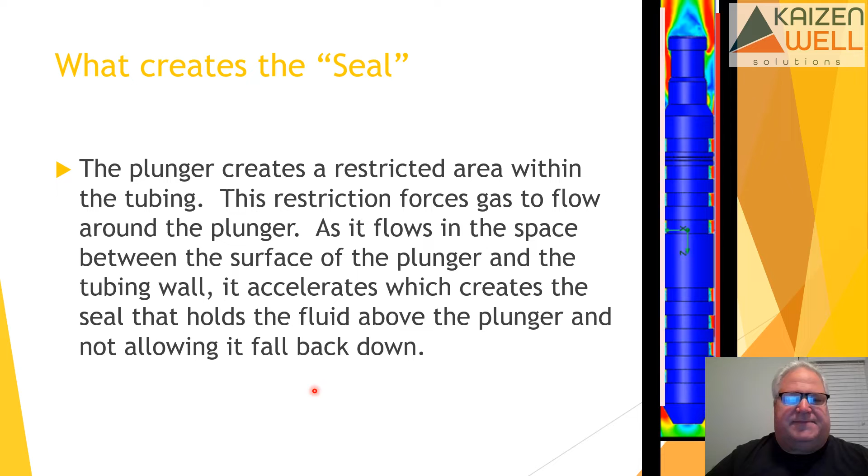So here's gas breaking around the outside. As that gas is coming around the outside, in this case it's an example of a ring or rib type plunger. Gas goes across these ribs, creates eddies and turbulence and stuff like that. That turbulence also helps increase the lift. Also, every one of these surface areas that there's a differential across increases that ability.

But if you didn't have these ribs or these different surfaces, what would happen is you'd get what's called channeling. So if this was just one solid piece of metal without any kind of profile on it, you'd probably have gas channel and break up one side and liquid just fall down the other. So it's important to have these type of surfaces in a ring type plunger, for example, to minimize the chance of that happening. It does increase the efficiency.

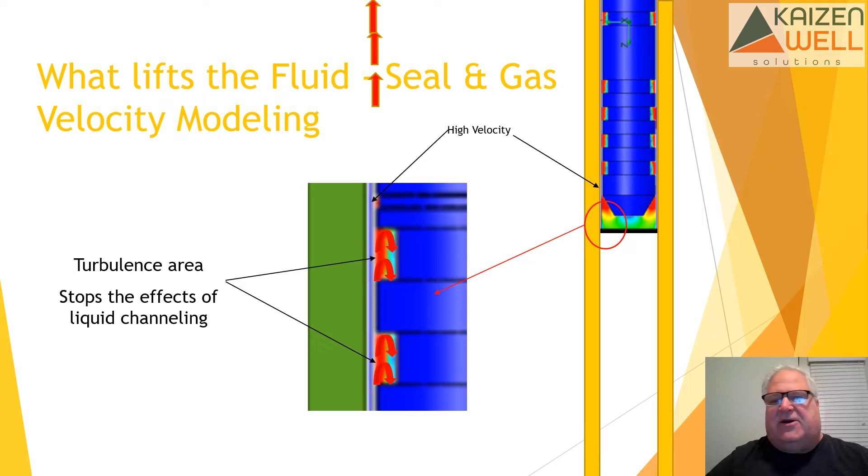So there's just an example, the plungers going by in this little animation. But as that turbulence is moving, it's definitely helping create an increased seal.

Now, one of the things that's really important to know is that a solid plunger, a ring type plunger, can never be greater than tubing drift. If it's bigger than tubing drift, there's a good chance that it could get stuck. Typically your drift area, when you talk about tubing drift, is the smallest area that should be in that tubing. So for example, standard 2 3/8 tubing would have a drift of about 1.901 inches.

And that's typically going to be in the collar area here. So when the plunger tries to go between the two joints where the collar is, that's going to be probably around 1.901 minimum. So that's the size.

Now, what's interesting and people don't realize is it's a very small piece of the tubing. When you get up to the middle of the tubing, most of that tubing is probably 195, 196, 197. So there ends up being quite a bit of area flowing around a plunger. Right away, that large area is one of the reasons why solid plungers are typically not as efficient as a pad type plunger or some of the other styles of plungers like a brush or whatever.

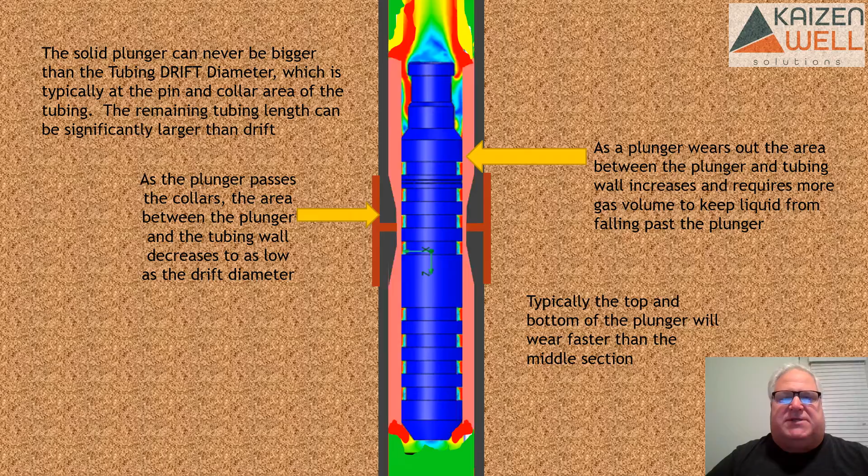Now, here's an example of a pad. Why is a pad plunger more efficient? Basically, these spring-loaded pads are able to push towards the tubing wall, and when they come to a tight spot, they can collapse, and then they can expand into these larger areas.

So it's keeping that area between the plunger and the tubing very, very tight. What's interesting is that when the plunger is traveling up and there's gas pushing underneath, that gas force is actually pushing these pads in, and they're not typically pushed right out to the wall. The gas is actually still running by them. They're not creating a metal on metal seal.

Now there might be a little bit of wear. You'll typically see these pads will wear more on the tops if they're like a dual spring type pad, because there's actually more pressure pushing the pad back in than at the top. So they run up the well at kind of an angle, so they'll wear more on one side than on the other.

The other thing that's interesting is, and we'll talk more about why you shouldn't use these in a wax or paraffin application, is that because the pads are collapsible, when you're bringing them up, they actually squeeze in just a little bit. That gas going by them pushes them in.

And if you're leaving even a very small microfilm of paraffin on the tubing wall, when that plunger goes up, it's squeezed in. And then when you stop flowing the well, those pads, the springs are able to push back out. And when it tries to drop, it is rubbing down the tubing wall. So even if you left a very, very thin layer of paraffin, that paraffin will start to build up underneath the pad and it can hang up the plunger.

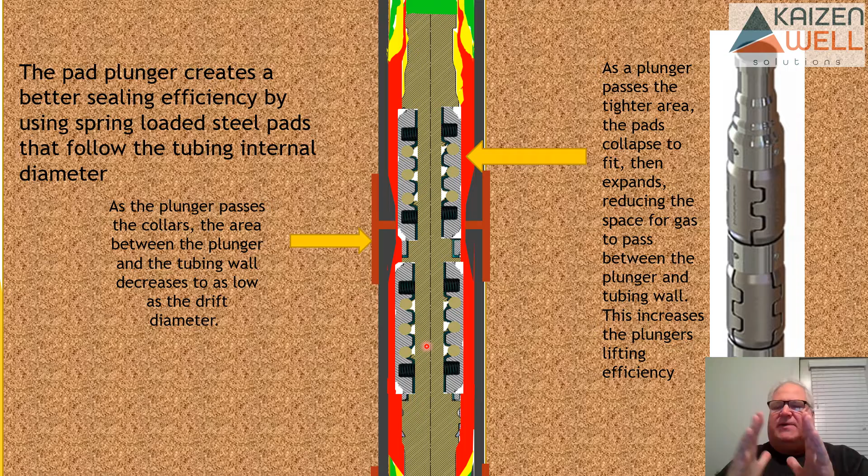So that's one of the reasons why you wouldn't use a pad in a paraffin application, just by that action, because it compresses and then it expands fully on the way down. So that's definitely one of the things you have to watch for.

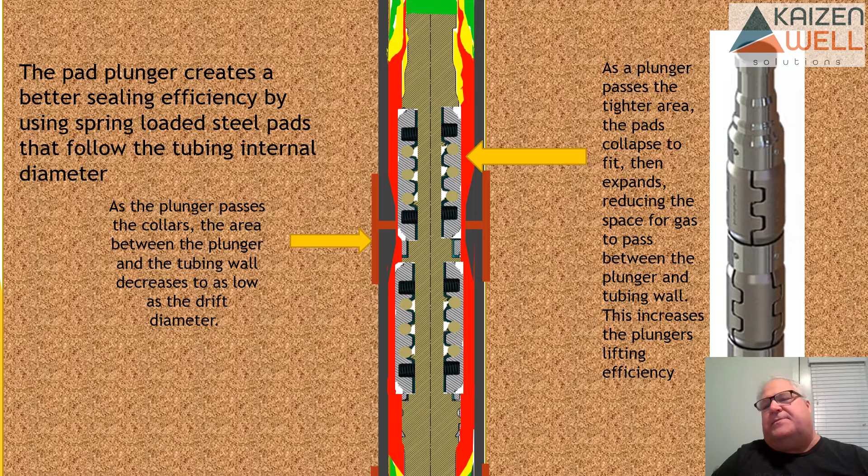We get asked all the time, when do we replace the plunger? Everybody wants to know what is the wear - do we replace it at 20 thou? Do we replace it at 30 thou? Or what? Well, the simple answer is that a plunger should be replaced when it impacts your production. And anybody that tells you you should do it at 20 thou, it's not being honest. You should replace the plunger when it impacts production.

But one of the easiest ways to decide or figure out when you should replace that plunger is your operator should be carrying some plungers in their trucks. And every month or so, they should go out there, look at a couple of wells, drop a plunger in, and look at the production yesterday versus the production tomorrow. Did we see an increase? Did we see an improvement? And if you see an improvement, then that plunger that you took out is worn too much.

You let it run too long, and that could be 1 month, 2 months, 3 months, 6 months, a year - it doesn't really matter. But once you've identified when it makes that uptick again in that well, that's good information to have, because if it was 3 months between the new plunger and when I put in the next plunger, what that tells me is that 3 months from now, after I put the new plunger in, I'm probably going to need another plunger replacement.

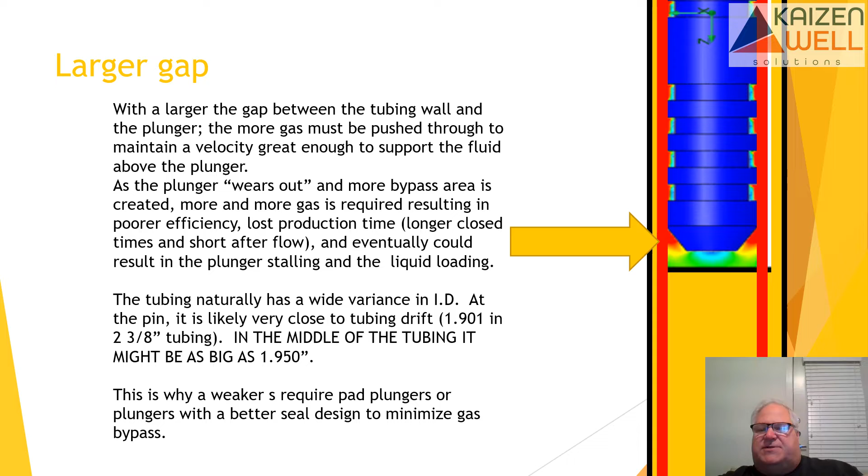Important point, especially about a rib or a solid seal plunger, is efficiency is not just the OD of the plunger. What even has a bigger impact than the OD is the overall length of the seal surface. So from this point to this point, the longer that area is, the more efficient the plunger will be.

Now, don't these when I call them plunger efficiency averages, it's probably kind of misleading. What this was is we took some data: how much gas flow did we need? What kind of pressure differential do we get across a plunger? There are several factors that we put into a bit of an equation that created this percentage efficiency.

Now, it doesn't really mean that a 10-inch plunger is only going to lift 42% of the fluid from the bottom. If you start off with a barrel, you're only going to get 42% there. That's really more an efficiency on the energy that it's using, how much gas it has to flow by, how efficient is the seal, and all that stuff.

But really what was quite interesting is when we got up to here with a 24-inch plunger, where we had a seal that was close to 24 inches long, we were almost as efficient as an average dual pad plunger.

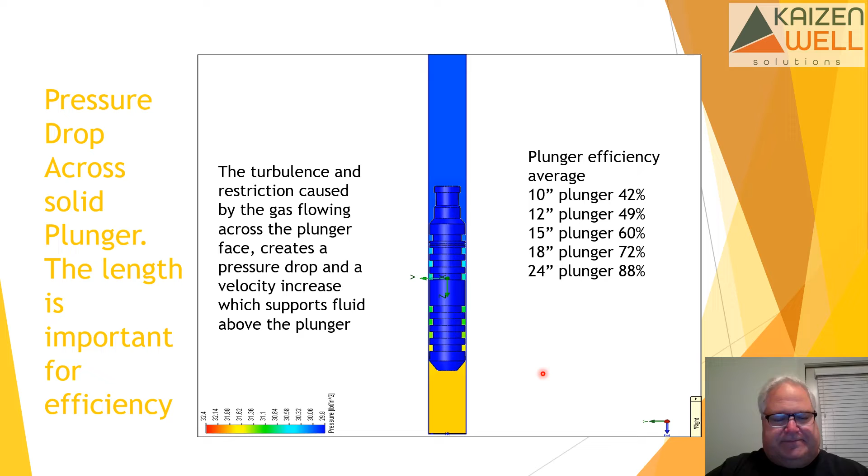Plunger efficiency. A plunger that's worn from 190 to 188 can actually lose over 50% of its seal efficiency. Really, what it means is it increases the bypass area between the tubing and the plunger by probably 50%, roughly. So there's a lot bigger area that it can flow by, and we've seen that when we track plungers using echometer and different methods, trying different plunger ODs and how that reacts in a well.

When a plunger is in a deviated section of the tubing, it also loses some of its efficiency.

It's interesting when we're following plungers that might be dropping and then they get to a dog leg in the well and it kicks over and goes straight again. We'll actually see the plunger speed up going through that dog leg, even though you'd think they'd slow down because they're laying against the tubing wall. But really what's happened is they fall against that tubing and there's so much bypass area created over the top, or less restriction, because when the plunger is falling in a nice vertical, it's shaking - you can hear it rattling and bouncing, creating extra turbulence and restriction as it falls down the well. When it gets on its side, it lays flat on that dog leg and has a large bypass area on top, and that plunger will actually speed up. We see that all the time.

It'll have the same effect coming up. If you've got a well with a large dog leg in the middle of a vertical section, you may have a lot of trouble getting through that section, and it can really impact the way those wells cycle. So that's something to be aware of if you're looking at your completions.

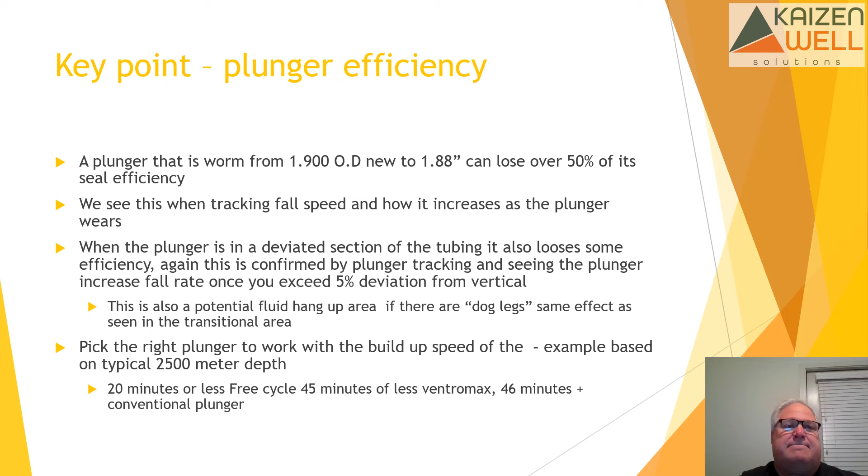This next section, we're just going to talk about seal types and kind of their applications - just where I would suggest to use a seal type and what application. It's not the plunger type, it's the seal type. So we're talking solid, ring type, brush, pad. Those are kind of the three main ones we would use. So we're going to talk about that in this next section.

So you've got a solid plunger. Here's an example of a solid plunger. It has a solid seal face, can't be collapsed, so it's not going to do well if you have tight spots or problems in the tubing. The pro is they're typically low cost. Some of the cons are they can be inefficient, but as we talked about, a properly designed solid plunger and the length of that plunger can really swing it from an inefficient plunger to quite an efficient plunger. Mostly used when we have wax or solids, and kind of general use - the general workhorse of most plunger lift applications.

There's another example where we have the ribs cut into it that'll make that plunger spin a bit when it's falling or in a gas stream.

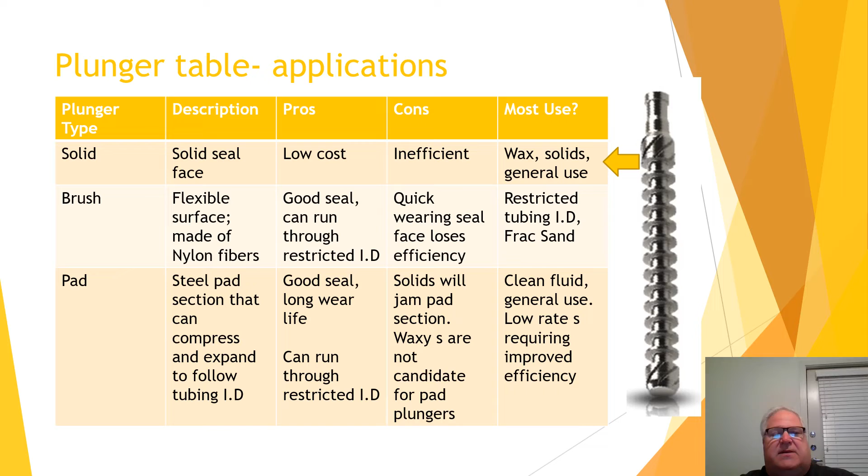Then we have a brush. The brush is a flexible surface, typically made of nylon. Sometimes it's like a coil slid onto a mandrel, sometimes actually wrapped and wired right to the plunger body. They have an incredible seal - in fact, some of the best seal you can get. But unfortunately, that seal lasts a very short time.

Typically this soft face wears very quickly. It can be affected by heat, so if you're putting it into a fairly deep well with high bottom hole temperature, it'll shrink that material very quickly. Once you've worn the fibers down, the plunger body here on the end will be like 1.86, or something like that. So it'll wear these fibers down quickly, and then you've just got a 1.86 OD plunger in a 2 3/8, and you lose a lot of efficiency.

Where I do like to use them is where you have restricted tubing, where you might not be able to use a solid, and you have solids present. If I had restricted tubing and didn't have solids, I'd probably run a pad plunger. If I just have sand, I'd typically try to run it with a solid or a ring type seal first - I find they work as good, if not better, than brushes.

Lots of times you'll find the brush, depending on the sand type, will actually pack into it, come up, and stick in the lubricator, whereas we can get solids to clean - they'll clean a little better when they come into the lubricator.

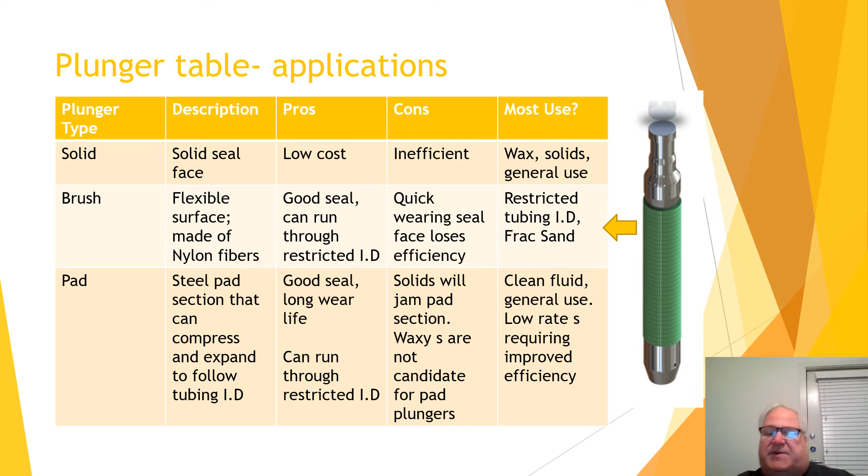So they have a great application, but I typically look to use them in lower rate wells, lower GLR wells. They have to be clean - you'd never use them with wax or solids. If you've got a nice clean well making nice clean oil or water, great solution. But if you have a really strong well, there's probably not a lot of advantage putting these more expensive plungers into the well.

The interesting part is these little ribs or vanes. Anybody who's run a plunger with those vanes will know when that plunger's sitting in the lubricator, lots of times you can hear them spin and carry on.

What they're really useful for is if you've got a well with a bit of deviation - you'll find a nice straight plunger like this actually starts to wear on one side. How that happens is these plungers aren't balanced or anything, so you'll always have one side a little heavier than the other. As the plunger's falling and starts to turn and lay on its side, the heaviest side rolls over and starts to wear, creating a wear face on that downward side.

Now you'd think, okay, it wears some material off, so it should get lighter and roll over. But that's not what happens - it flops around and rolls and gets into that saddle, and once it's in that saddle it just keeps wearing, getting worse and worse. So if you're seeing plungers wearing on one side, that's really what's happened - it created that saddle, and then it's just falling into that saddle every time it gets into a dog leg or deviation.

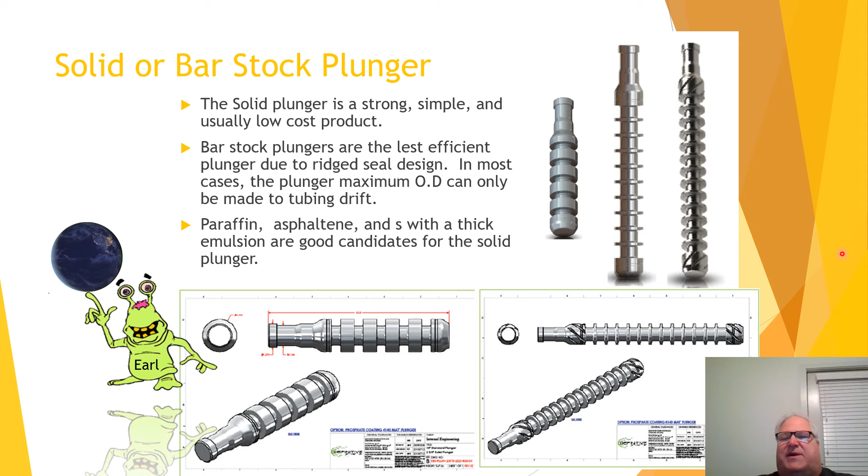So it's kind of a recap on that. Typically, you'll find that these steel areas above the pads are undersized. Like I was mentioning, they should be like probably in a 2 3/8, 1.86, and that wears this brush pretty quickly within a month or so, or even sometimes weeks or days. This seal can be worn down quite small, and then you start losing a lot of that efficiency that you were getting when you first put them in.

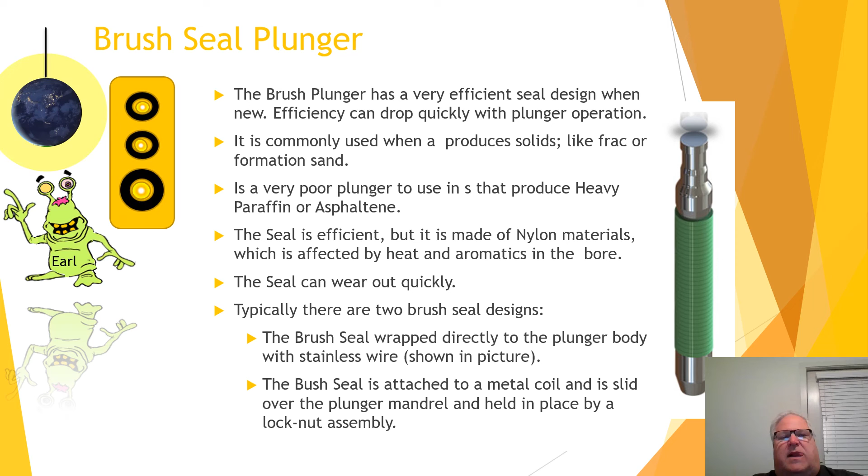Today, the majority of our work is in shales and things, and we're getting a lot more paraffins and sands and other issues, which pad plungers are not great in. You definitely don't want to run a pad if you get any kind of sand. It can pack in behind these pads, lock them out. You can get the plunger stuck.

I explained before how paraffin can be left behind because of the way the pads get compressed, and then they can expand on the way down, allows the plunger to hang up. Then you get some fast runs and smash stuff up. So the only time I would recommend that you're looking at these plungers again: a nice clean well, can be nice clean oil, nice clean water, no sand, very, very tiny if any paraffin at all. And if you've got a weak well where you need that really high efficiency.

If you don't, look at a solid plunger, run a little longer plunger, whatever, and it'll last a long time, or it'll last very well. You have fewer moving parts, and typically your cost of operations is going to be a little bit better than running a pad in a higher rate well, because you're not going to be pounding on them so hard. In a low rate well, 100%, great application.

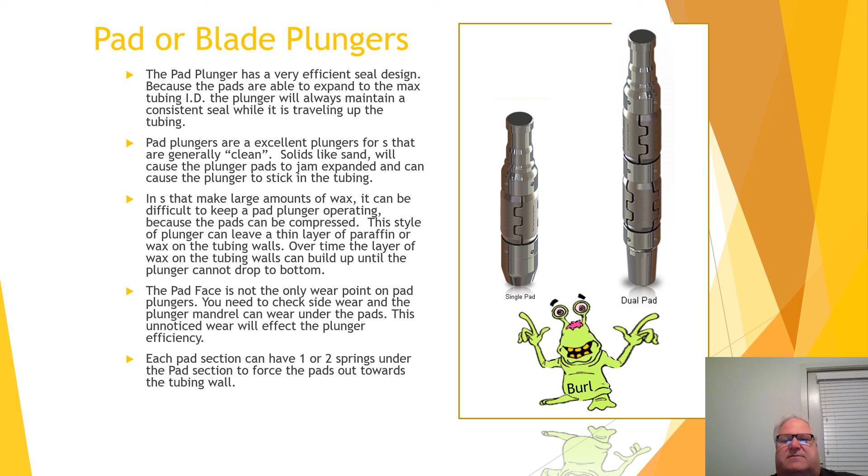So that's my discussion about plunger seals and their application. I'll have another short presentation - I guess it's not that short, it's almost 30 minutes long now. So I was hoping to keep that around 15 minutes, but I talk too much. But anyways, hope you got something out of it and some information on how pads work and their application.